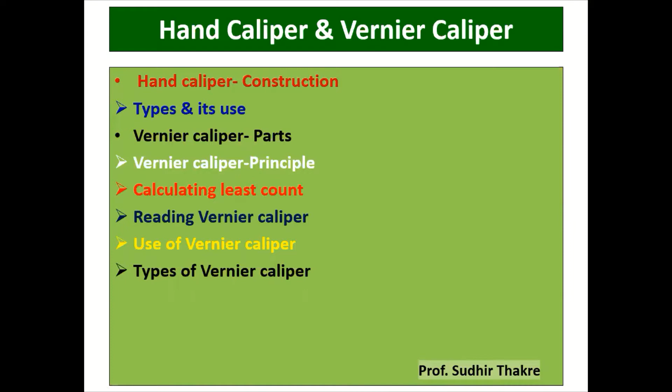In that, we'll cover the construction of hand caliper, type and its use. In second part, vernier caliper, in that different parts we'll see. Then the principle of vernier caliper, calculating the least count, reading the vernier caliper, use of vernier caliper and type of vernier caliper. So all these points will be discussed in today's video.

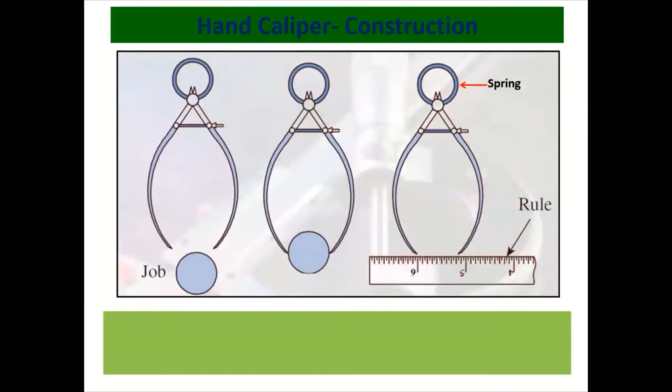First, we'll go for the hand caliper construction. Caliper is used to transfer the dimension from job to the steel rule. From this diagram, it is very clear. This is a caliper. If you want to measure the diameter of the job, we just touch the leg or a tip of that leg to the job, and we can transfer the dimensions over the scale. So in this way, we can use the caliper there.

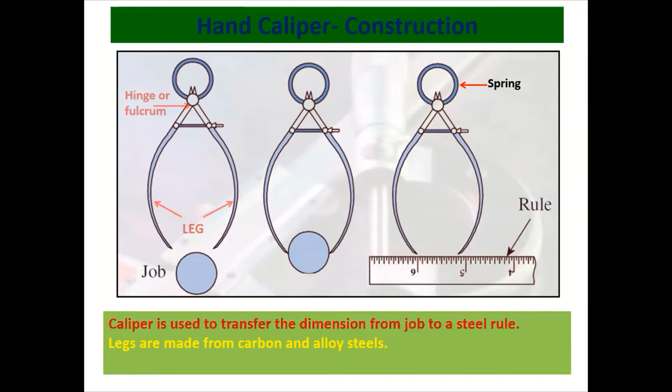The caliper consists of two legs and they are hinged at the top, or we can say that is a fulcrum point also. The working end of this caliper, these are the working points, and they are hardened and tempered to have sufficient hardness. The legs of this hand caliper are made from carbon and alloy steel.

The accurate use of the caliper depends upon the sense of feel of the operator. However, the correct sense of feel can be achieved only by practice or the experience required for that.

Then the legs, if you see the legs of the caliper, they are exactly identical in shape, with the contact points equidistant from the fulcrum. These are the contact points, right? And these contact points, if you observe here, are exactly equidistant from the center of this fulcrum.

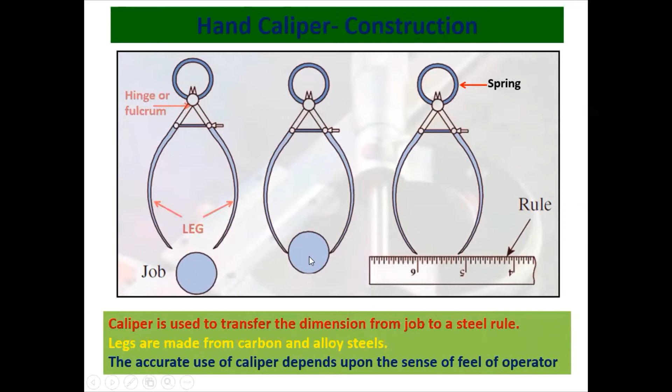Then type of caliper and its use. So there are two types of caliper. One is the firm joint and the other one is the spring type. In firm joint and spring joint, again there are two types. One is the outside caliper and the other one is the inside caliper.

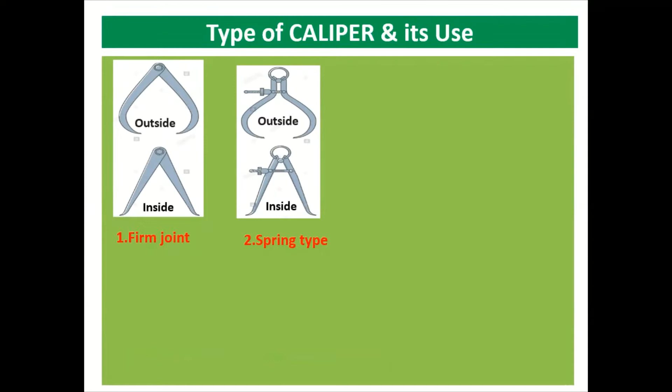So when you are talking about the firm joint, as the name itself suggests, it can hold the two legs open to a particular degree unless moved by some certain force, and for that again the lock nut is provided. So the lock nut is needed to lock the caliper in a particular position, and then we can transfer it to the scale. So for that reason we always need the lock nut in the firm joint.

Then the spring type, spring caliper, can hold a particular position of a leg. These are again the two legs here. With the help of spring, we can observe in the diagram, this is the spring. The spring pressure acts against an adjusting nut. This is the adjusting nut in your diagram. I will show you. This is the adjusting nut.

Means here we don't want any lock nut, but instead of that a spring is provided, right? And due to that spring, the position of the leg can be adjusted by using this, you can see in this diagram, this adjusting nut here.

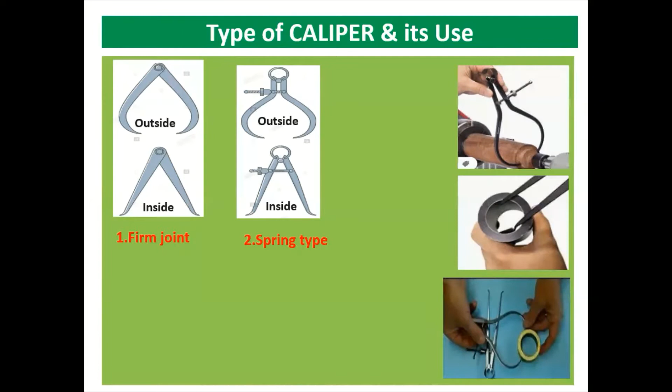As per the use of it, this is a job where we are holding it on the wooden lathe machine and we are measuring the outer diameter by using the spring type caliper. Here again we are measuring the internal diameter by using an inside caliper. In this diagram also, we are measuring the outer diameter of the bush by using the outside caliper.

We can transfer the dimension of the caliper to the micrometer also, or even to the scale. Both options are there. This is how we are measuring the thickness of a plate. But after all, we need a scale, right? So we are transferring that to the scale or a micrometer, and only then can we get the reading.

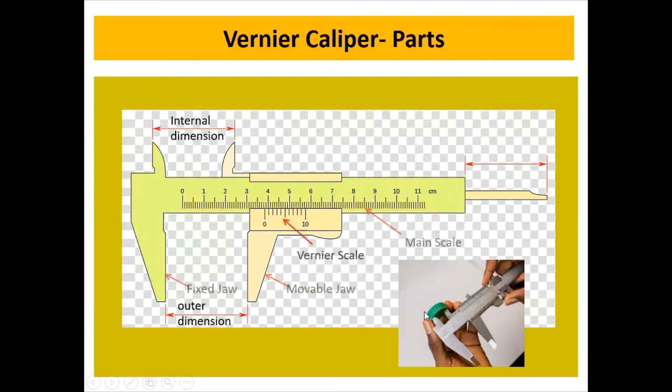And the second one is to measure the internal dimensions. Here again, one is the movable jaw and the other one is the fixed. So with the help of this we can also measure the internal diameter. Here I am showing we are measuring the internal diameter of the cap. Then the depth bar; this depth bar is used to measure the depth. So here also I am showing how to measure the depth.

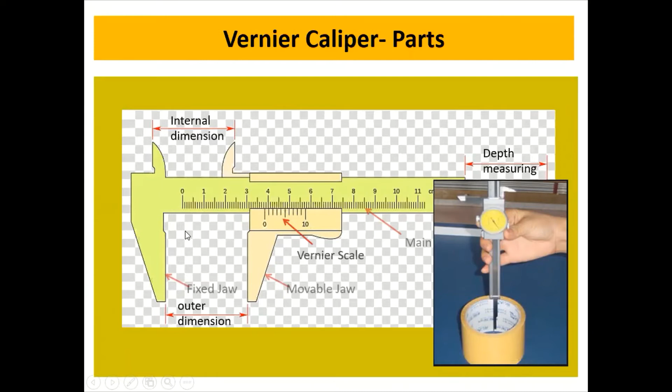But before using any vernier caliper, you must see that the zero of the main scale and the zero of the vernier scale coincide when we close both jaws, the fixed jaw and the movable jaw. Now this is a lock nut. So when we are holding the job between the fixed jaw and the movable jaw, you should not remove it first. First you lock the nut and then you can remove it. For that reason, the lock nut is provided. Otherwise, the dimension will get disturbed.

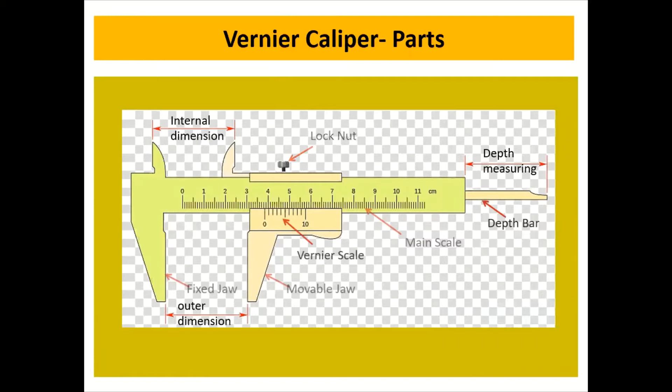The vernier caliper principle. When two scales, the main scale division and the vernier scale division, having a slight difference in size are used, the difference between them can be utilized for increasing the accuracy of the measurement. You can see here we have shown the main scale. The upper part is the main scale and the lower part is the vernier scale. You can observe the number of divisions on the main scale, and at that position I have shown the 49th division of the main scale coinciding with the 50th division of the vernier scale.

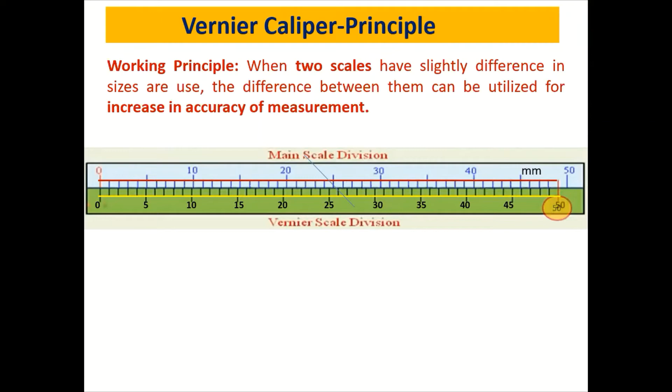So how are we calculating the least count here? First, you can see the 49th division of the main scale is coinciding with the 50th division of the vernier scale. That's why we write 49 main scale divisions is equal to 50 vernier scale divisions. Now this is an enlarged view. We are starting with the 0 of the main scale and the 0 of the vernier scale. The upper one is the main scale and below is the vernier scale. The distance between these two lines is 1 mm, and that is a main scale division.

So 1 MSD means 1 mm main scale division, and 1 VSD means vernier scale division. That has to be calculated; we don't know its value. So 1 main scale division is equal to 1 mm, but 1 VSD, vernier scale division, we don't know. For that, 1 vernier scale division is equal to 49 main scale divisions divided by 50 vernier scale divisions, which gives you 0.98.

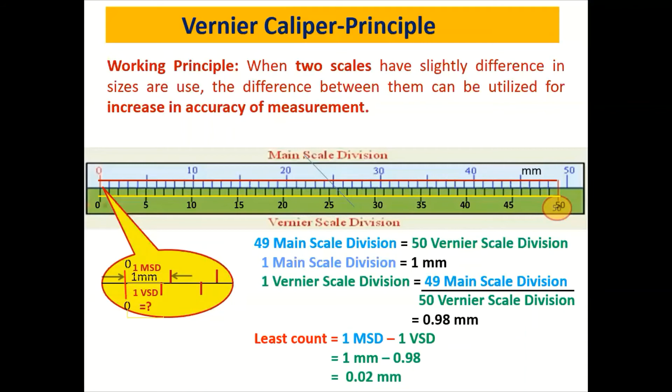Okay, so least count is equal to 1 MSD, main scale division, minus 1 VSD, vernier scale division. So what is the value of 1 MSD? That is 1 mm, and 1 VSD we have just calculated, that is 0.98. So you can substitute that value and we'll get 0.02 mm, right? So this is how we can calculate the least count. There is another method I will show you for calculating the least count. There is a very simple formula.

Least count, which is always denoted by LC, is equal to smallest division on the main scale divided by number of divisions on the vernier scale. Now here, if the value of smallest division on the main scale is 1 mm, in the previous example also we have seen that the distance between the two lines is 1 mm. So here also I'm taking 1 mm. And the number of divisions on the vernier scale is 50.

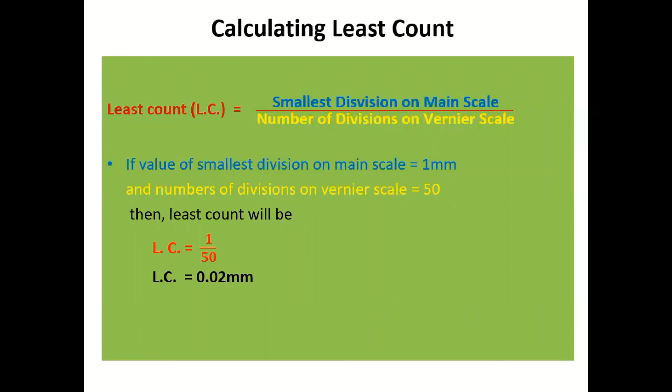Now, as per this formula, we can calculate the least count: the smallest division is 1, and 50 is the number of divisions on the vernier scale. That will also give 0.02 mm. So this is again a simple method to calculate the least count of any vernier caliper. Now, how to read the vernier? For that, you should know the formula: total reading is equal to main scale reading plus (vernier scale reading × least count).

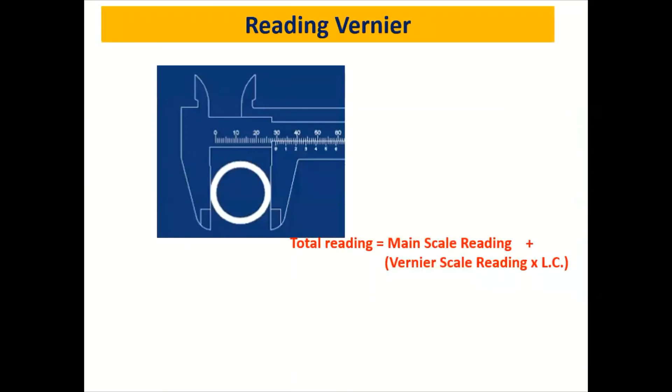Suppose you want to measure this job, and I will show you the enlarged view of that. Here, I want two readings. One is the main scale reading and the other one is the vernier scale reading. The least count we already know is 0.02 mm, but both are unknown here, main scale and vernier scale. This is the main scale and this is the vernier scale. This is again the enlarged view I'm showing.

Now the 0 of the vernier scale is already crossing the main scale at 5 mm. It lies somewhere between 5 and 6. But since it already crossed 5, your main scale reading is 5. Then I want the vernier scale reading. You can see in this diagram, none of the vernier scale divisions is coinciding up to this, but this division is coinciding with one division of the main scale. Here, the 7th division coincides with the main scale.

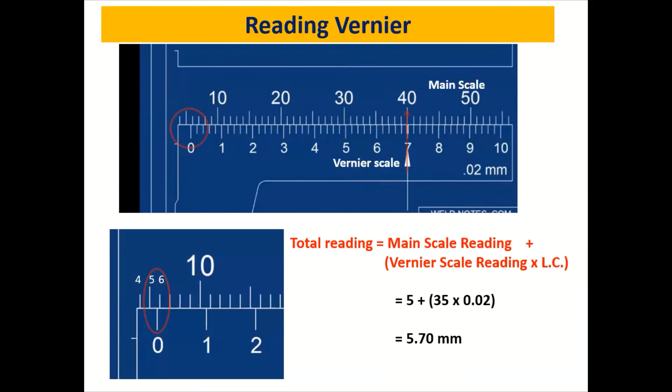But when you're talking about the 7, you can see 0 to 1. So how many divisions are there? 1, 2, 3, 4, 5. Means 1 means 5, 2 means 10, 3 means 15. Like that, 7 means 7 fives are 35. So your main scale reading will be 5, vernier scale reading is 35 and least count is 0.02. So the total reading will be 5.70. So in this way, we can read the vernier by using the formula that total reading is equal to main scale reading plus vernier scale reading into least count.

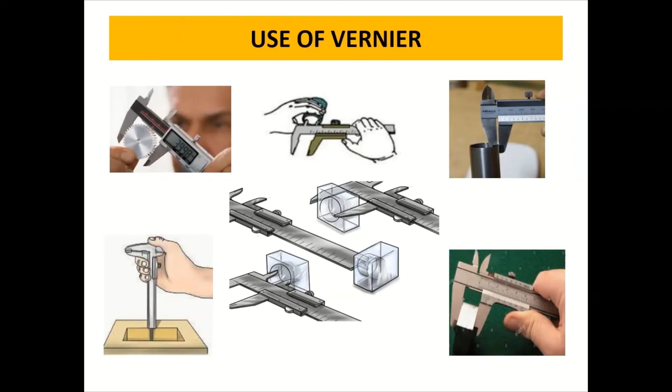Then types of calipers. This is just a standard, or I can say the simple caliper. Then this is a dial type caliper. Means instead of a vernier scale, the dial gauge has been used in place of the vernier scale. Then this is a vernier depth gauge. This is how I am showing the application of that. Then the vernier height gauge, which is used to mark with the help of a scriber, or you can measure the height of the component also.